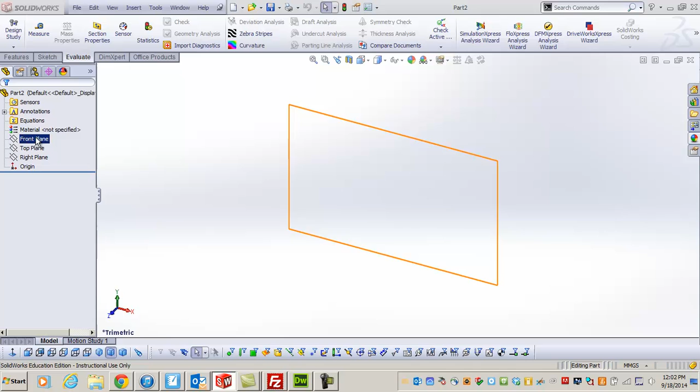We're going to set to mmgs, which it already is. Let's set our material to ductile iron, and we're going to begin with a save as 3-7 in our appropriate named drive, and we're going to begin with a sketch.

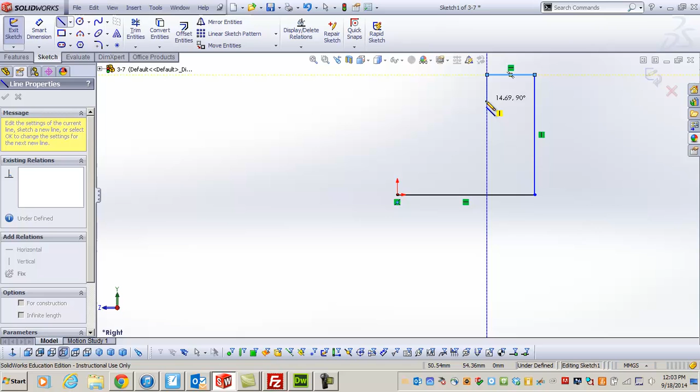With this one, it's best to start with the right plane, and our origin on this one is the lower left-hand corner. So I'm working my drawing, doing a left, and this one has 3 distinct steps.

Our overall height of this piece is 60 millimeters, and our overall width or length is also going to be 60, but instead of doing a dimension like this, I'm going to show you something a little different. We're actually going to add a geometric relationship.

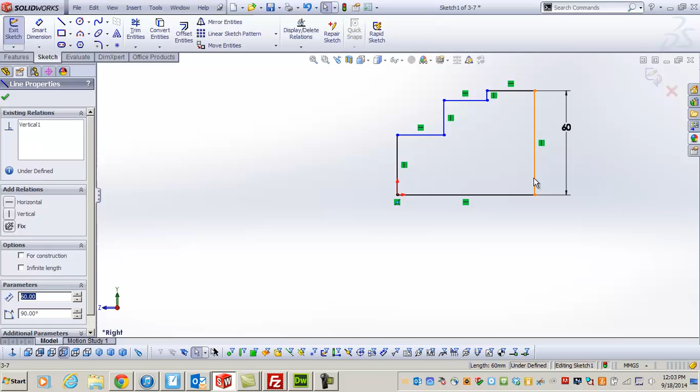So I'm going to come in and click on the vertical that I created, hold my control key down, select the horizontal line, and add the equal. Immediately we notice that we have an equal here to equal here, and it's number 1 because that is the first geometric relationship we've added in.

The next thing we're going to do is dimension the top step. The top step is 20. And this one here, we're going to add some equal relationships again because all of these are 20. So select our horizontal, control key, select the vertical, and equal.

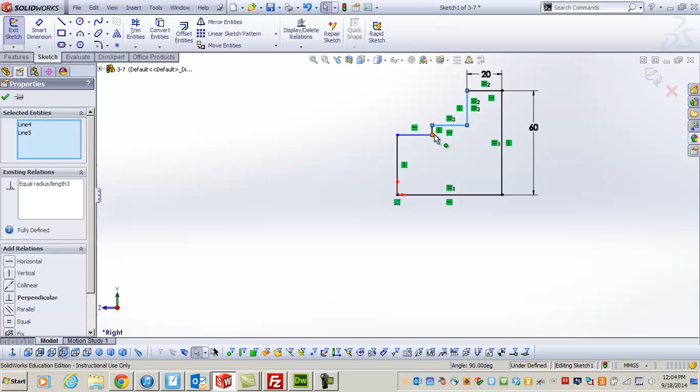Again, we're going to do the same thing here: vertical, horizontal, equal, equal, and it automatically will work out because you have this equal. So we should have all of these come in to be equal. If I actually wanted to just check, and sure enough, it's 20.

So now we have this wonderful piece that we have the stairs, 20, each step is 20, and its overall height and length is 60.

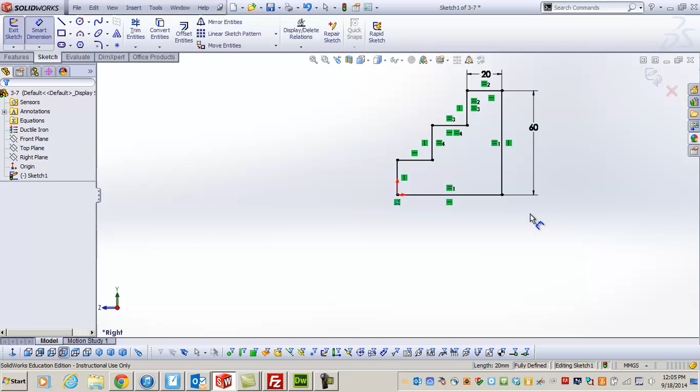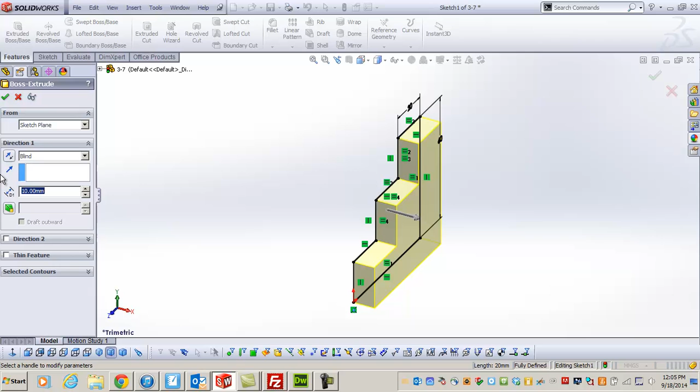We're going to extrude this piece, and with this one here, we actually want it to come forward just the way it is. We want it to go to our right, and our overall length of this piece, or depth of this piece, is going to be 110 millimeters.

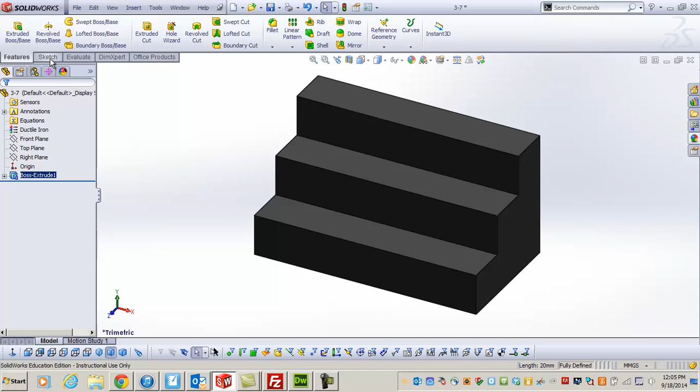You notice now that it's not completely in the screen. Remember, if you hit the F key on the keyboard, it will zoom it in so it's sitting into your area completely. Now we're going to do our second sketch, and we're going to select our front face, not plane, but a face.

Again, I want to right click on the sketch and select normal to, so it actually brings us in so we see our origin in the lower left hand corner. I'm going to come in and do a sketch of a line, and I'm actually going to be cutting a diagonal line across.

One of the things I'm noticing here is I didn't hit that top. Here's a trick: if you hit trim and do power trim, and I'm going to scroll in, and if I come in and I just deleted the whole thing, that's one way you could get rid of the line, or I could have hit delete.

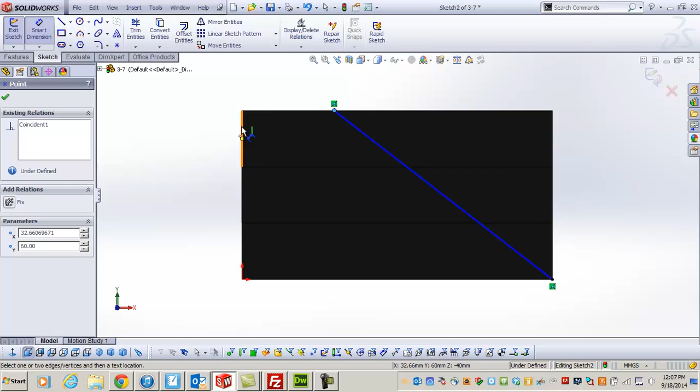So I'm going to again select, make sure I'm on the orange line, and go to the end of the corner. So I have a coincident point here and a coincident point here. I'm going to smart dimension, and I want from this point to the edge of the block to be 40 millimeters. And there I have 40, and I automatically have black because I have two coincident points with an actual distance being given.

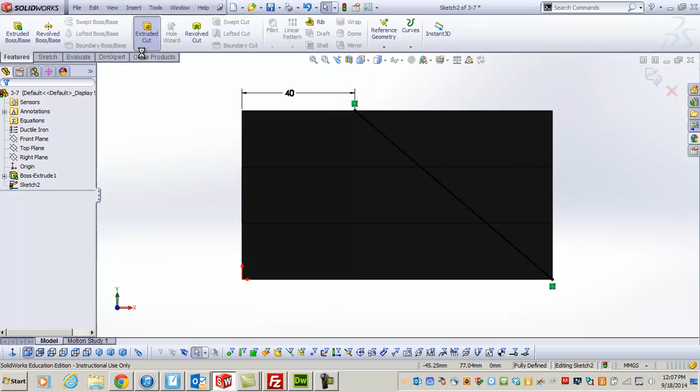I'm going to do an extrude cut. Now with this one here, I want to push down on the middle of my mouse wheel, and I want to make sure when I'm looking at this that this arrow is pointed up because I want to cut the material away. And there we have it, it's cut away, and there is what our piece would look like.

With mass properties of this one, there is a mistake in the book. The mass should be 1,410.53 grams. X should be 43.49. Y should be 19.73. And Z should be negative 35.10.

And the reason Z is negative, of course, is because when we did our extrusion, we went to the right-hand side, and our origin is to the left.

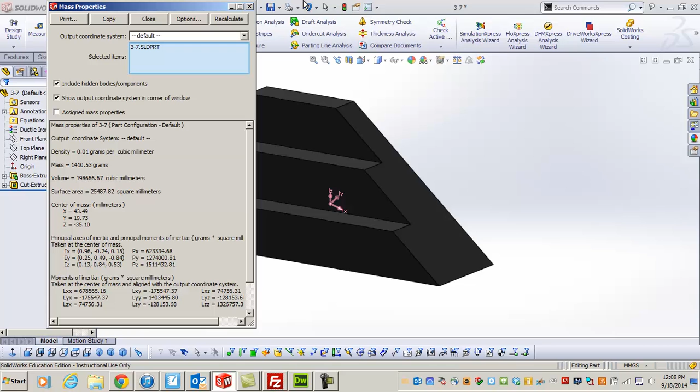Okay, so there we have our lovely piece. I'm going to save it. Remember, we can just hit the save button here, or we could do a Control plus S on our keyboard for our shortcut.